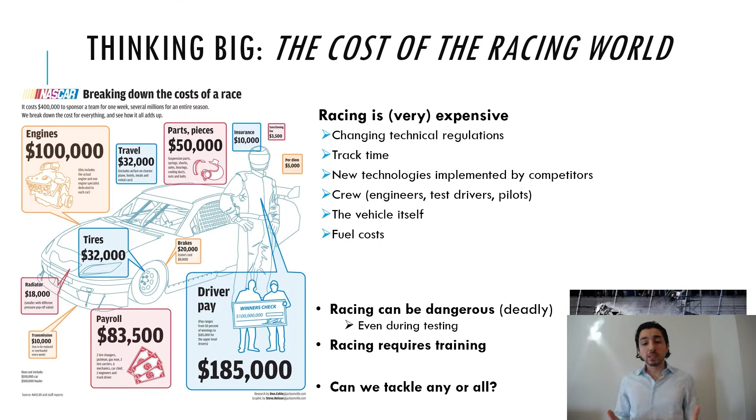Racing also requires a lot of training. So a question naturally arises: can we tackle any of these aspects? Can we save expenses somehow? Can we tackle one of them, or can we tackle all of them at the same time? The unsurprising answer to this question is a resounding yes.

So who cares about racing, and why do they care about racing? It is not only the driver and the racing team who want to go on and win the prize. There's other sponsors, there's the car consumer who maybe wants to buy a vehicle which they've seen on TV and has been proven to have some reliability. Most importantly, however, there's the car manufacturer. Because their car reputation is on the line, having a car they've built go on and win a major racing event could potentially mean millions of dollars in marketing cost savings or a sales boost.

A good example of this is actually back in the 1960s, when Ferrari invested their entire budget in the racing division and went on to win all the major racing events, which eventually led them to the place they have today as one of the best car manufacturers, only because of their racing heritage.

Now, many racing teams nowadays rely on other methods for testing. They rather optimize subsystems separately, which actually does not ensure that the system itself is optimized to work within itself. And they rather spend a lot of money on buying track time. Naturally, this carries a lot of unnecessary risk and expenses. Some teams out there have started to lean towards the use of a simulator. However, most simulators nowadays cause motion sickness. They're basically glorified video games, and they do not help the driver learn the car itself, only the track on

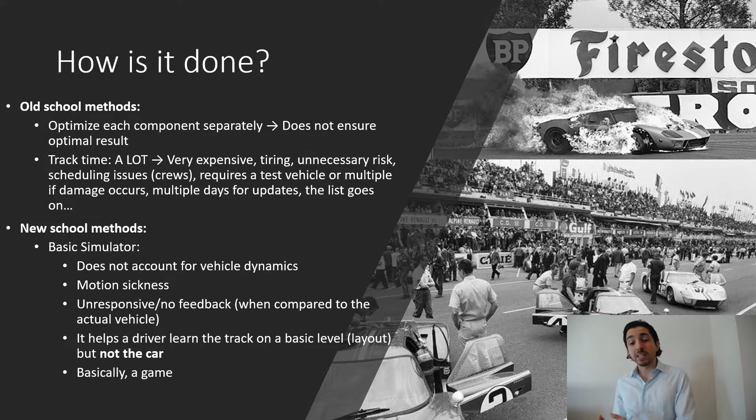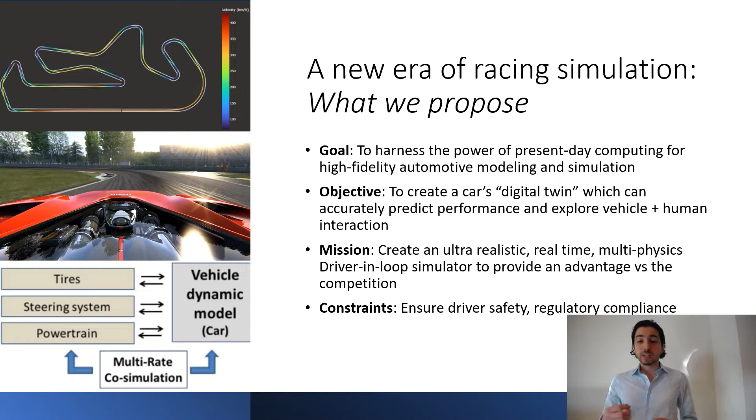a very basic level. Having noted some of the weaknesses of present-day simulations, what we propose right here is a new era of racing simulation, in which we harness the computing power of present-day systems in order to create a fully fledged digital twin of the actual car on the actual race day. This will be an ultra-realistic, real-time, multi-physics driver-in-the-loop simulator, which, unlike other systems, can actually explore the human-vehicle interaction which occurs during the race. The driver can get feedback from the car, and the car can get feedback from the

driver. Now, the advantages of investing in such a system are not only the obvious ones. It's not just about cost reduction and minimizing the risk for the driver. There's also opportunities for the engineers to tune the vehicle to different specifications with simply the click of a button and get immediate feedback from the driver as to how the vehicle responded to those changes. For example, different suspension parameters can be tested, or reaction forces on the steering wheel. There's endless possibilities as to what can be tested, and immediate feedback can be obtained from the driver without the need to actually modify a real vehicle.

There's also the opportunity for the driver to have as much simulator time, as much practice as needed, most importantly, whenever it is needed. Finally, the most powerful tool of our system is the ability to optimize not only the different components of the car, but rather the entire system itself. We will optimize the human plus the vehicle and the subsystems, the vehicle and the track, and finally the driver and the track through the use of the optimal racing line, which shall be explained by Dev during our concept of operations.

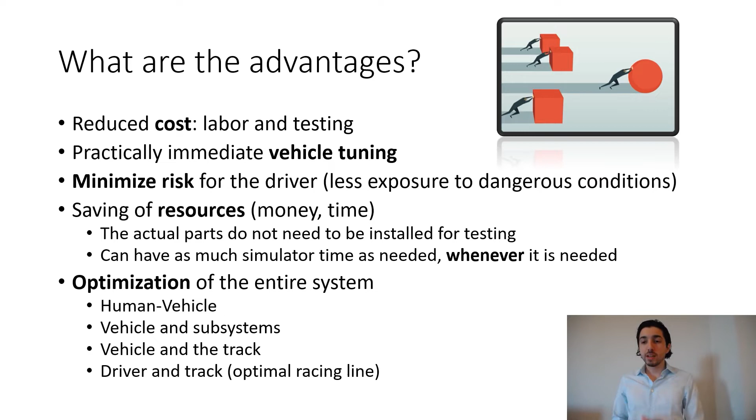Thank you, Jesse. That was a great introduction about the GT4 racing industry, and I also want to personally thank you for creating this awesome ConOps slide. So previously, Jesse highlighted the need for a GT4 simulator and how it reduces dependency on real-time physical testing. Now I'll be presenting on how we plan to implement this GT4 simulator with this ConOps slide.

So as you see from this slide, we have 4 different phases. Phase 1 is racing line determination, phase 2 is simulation training, phase 3 is the actual physical lap test, and phase 4 is validation and optimization.

So I'll be going into the depth of phase 1, where we have engineers working behind the screen in the control room, where they'll be studying the lap circuit, and they adjust the vehicle conditions and run automated simulations to come up with the best theoretical lap. Now once they have the best theoretical lap, they want to evaluate it with a driver in the driver-in-loop simulator.

So in phase 2, the driver, or probably I should call them a racer, will be called, and they will be driving the driver-in-loop simulator, and the feasibility of the theoretical test will be evaluated against the simulated data. And the best part about this driver-in-loop simulator is that there will be constant feedback from the engineers in the control room, where they actually give feedback to the racer if he is moving away from the trajectory of the racing line.

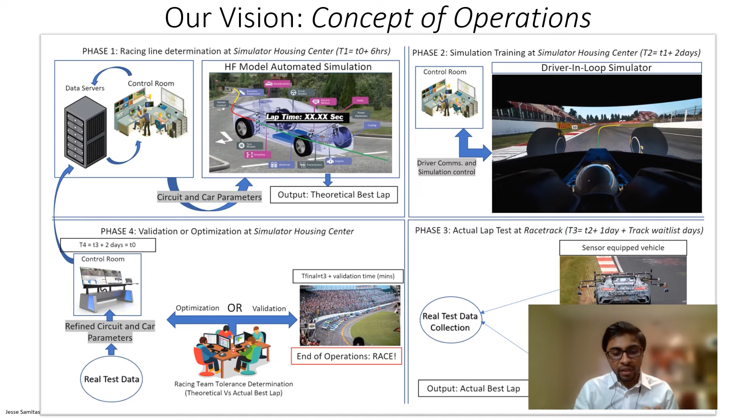So that is all our ConOps, and after this one might wonder, what if someone has done this before? To our best knowledge, no one has come up with a GT4 driver-in-loop simulator per se, but there are some competitor simulators in other racing industries. For example, Ford has an R&D center only for the NASCAR racing team. Mercedes and Ferrari, on the other hand, have a driver-in-loop simulator for their Formula One teams, and there are some custom-made simulators in the market.

But as you can see, all these simulators have some pros and some cons. For example, Ford's simulator has motion sickness, and their simulator doesn't resemble the actual car. Mercedes is only for experience. Ferrari, on the other hand, has a state-of-the-art simulator, but even that doesn't have a high fidelity model. So it shows that there is room for improvement in developing a simulator, and that is what we are aspiring to do.

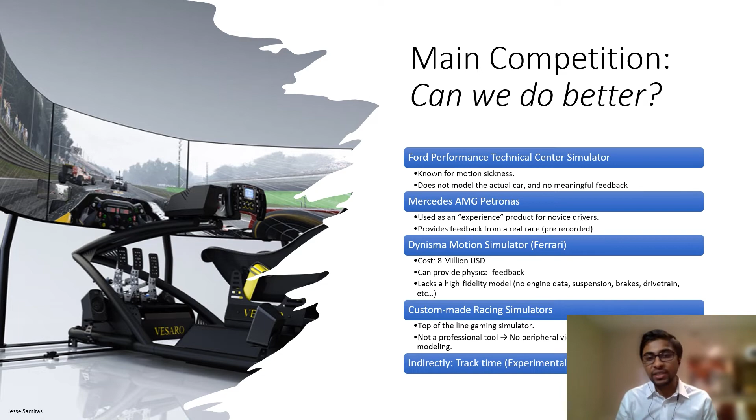We want to create a simulator that is the best for the GT4 racing industry, and that doesn't have any cons that are listed in all these competitor simulators. Now I'll be passing my torch to Tom, who will be explaining more about the design aspects of the GT4 racing simulator.

Thank you. Thanks, Dev. So with this concept of operations in mind, we set out to determine what the top priorities of our customer are. We implemented a rigorous quality function deployment and determined several stakeholder and customer needs that broadly fall into 4 categories: providing a return on investment in terms of lap time, keeping the driver safe, providing a sense of familiarity to the driver between the simulator and the on-track vehicle, and obtaining a competitive advantage over the competition.

We then identified several key metrics to evaluate possible designs on. These include data transfer rates into and out of the simulation computing hardware, the refresh rate, frame rate, and field of view of the visual display, the simulator runtime without maintenance, i.e. the reliability of the entire system, racing line determination time, the degrees of freedom achieved by the cockpit or cabin, how long it takes to configure a new simulation with a new setup on the vehicle, and latency between driver inputs and visual and audio feedback.

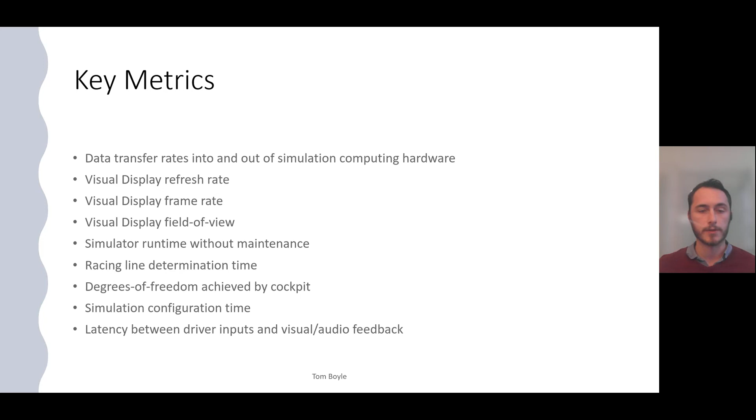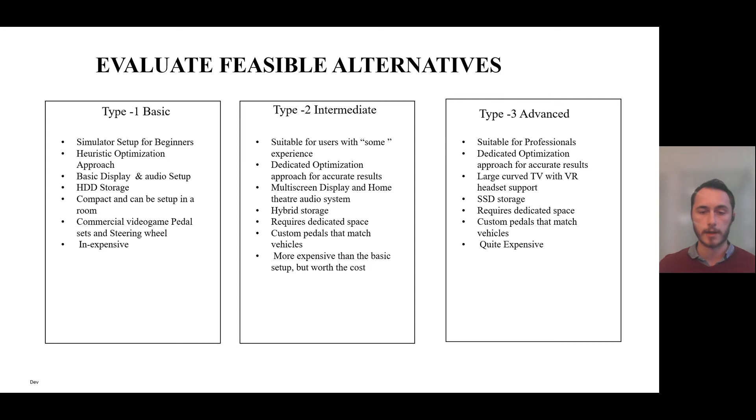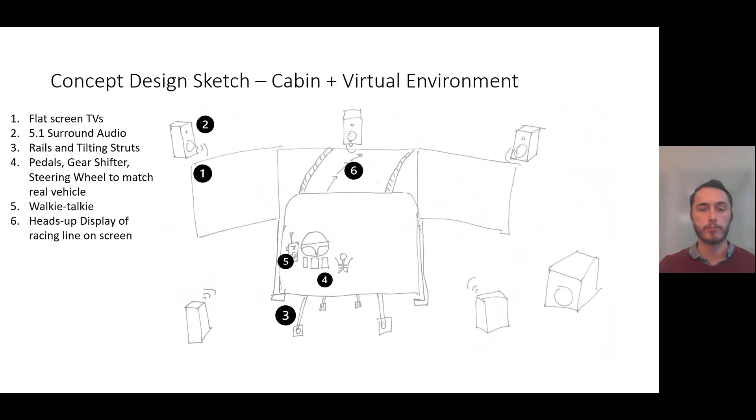The design concept uses custom pedals, wheels, and a gear shifter that will match the real GT4 car, providing that sense of familiarity for the driver between the simulator and the on-track vehicle. It will also include communication capability between the driver and the simulation operator or the control room. And lastly, the on-screen display will include the option to display a racing line with speed and trajectory corrections for training and practice for the driver. That's the cabin and virtual environment.

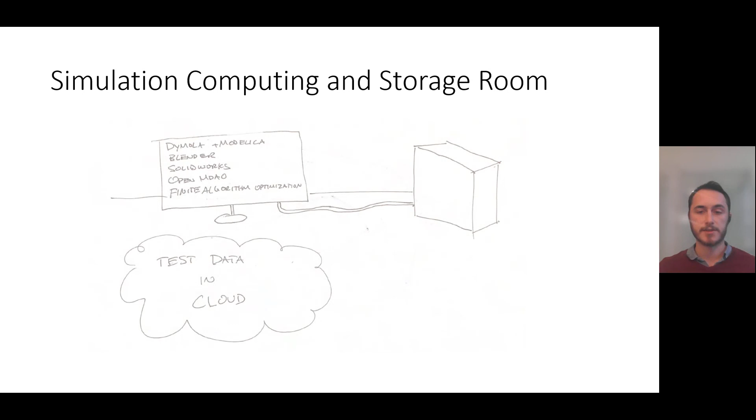In conclusion, the GT4 simulator provides a clear advantage by reducing or even eliminating the need for dangerous track time. A driver-centric display and low latency will eliminate motion sickness and enhance realism for the driver. The use of our optimal racing line will provide advantage versus the competition by noting the best theoretical speed and direction corrections during a race. We can put any track shape or parameters into the simulation, and we can use the simulator as a training tool or comparison tool for multiple different drivers.

The high fidelity and multi-physics aspect of the simulator allow the driver to learn how the actual car will behave, especially after configuration changes. And the simulator's physical feedback and modular cockpit design will provide a sense of familiarity, enabling the driver to move seamlessly and confidently from the simulator to the on-track vehicle.